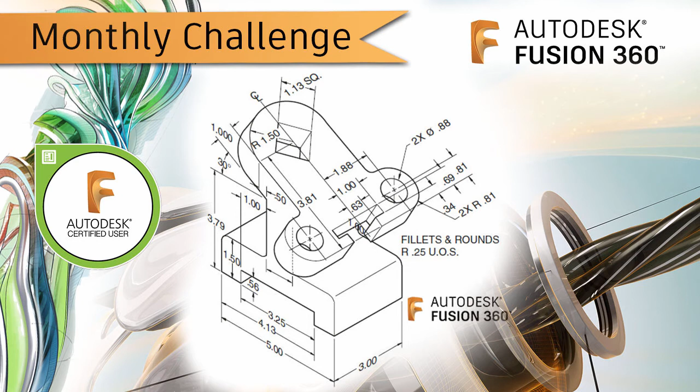For this video, we will be creating the challenge for April. Let's get started. Our challenge is in units of inches, so we're going to change active units, unit type to be inch, and hit OK. If this is your first time, under Preferences, make sure Preview sketch is turned on. Hitting OK, let's start with the rectangular base.

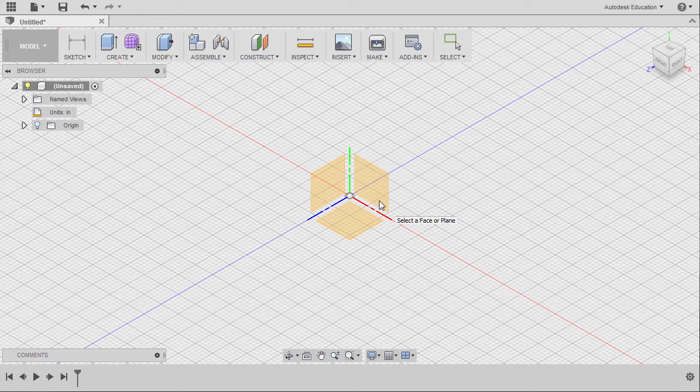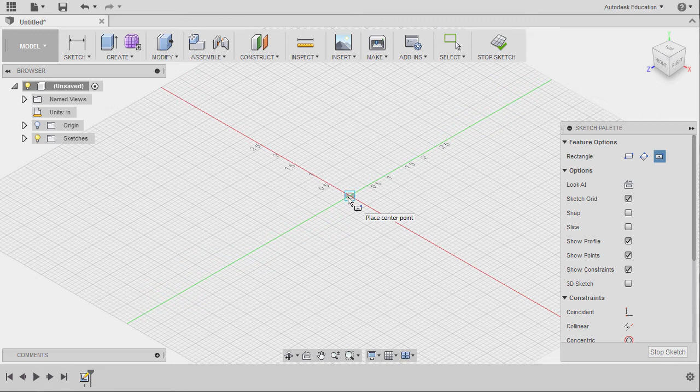I'm going to hit R to grab our rectangle. We are prompted to select a plane or face, selecting our XZ plane, left click. Under feature options, I'm going to change my rectangle to center rectangle, and go to home view for an isometric view. Our first point at the origin. For the length, I'm going to key in 5, hitting tab, and keying in 3 for the width, hitting enter.

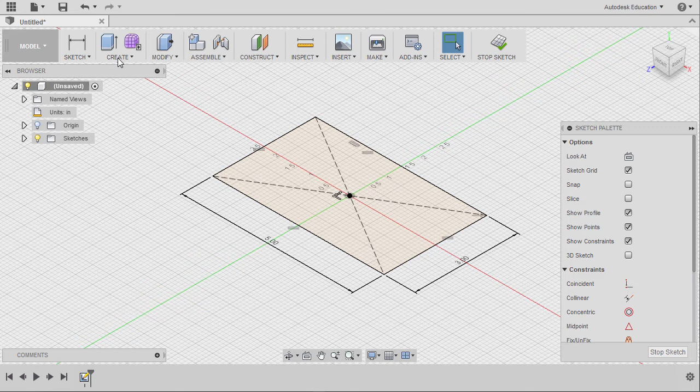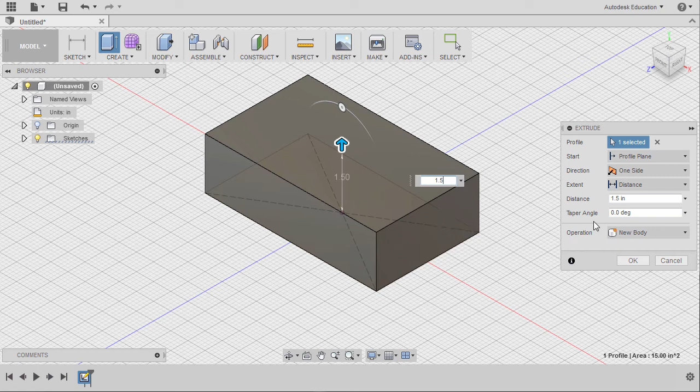Let's extrude this sketch profile now. I can hit stop sketch and grab extrude, or immediately hit E for extrude. Prompted to select a profile, selecting our rectangular profile, dragging this arrow up, the height to be 1.5. Operation new body, and hitting OK.

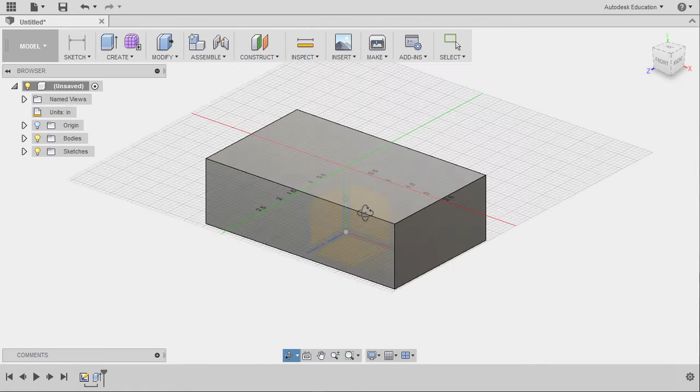Next, let's create the rectangular cut here at the bottom. I'm going to hit R to enter rectangle sketch mode. I wanted to select the plane, but it's inside, so to select this one, I can hold my left mouse button, hovering over the target selection, and a drop down will appear. Our intent is to select XY, selecting XY.

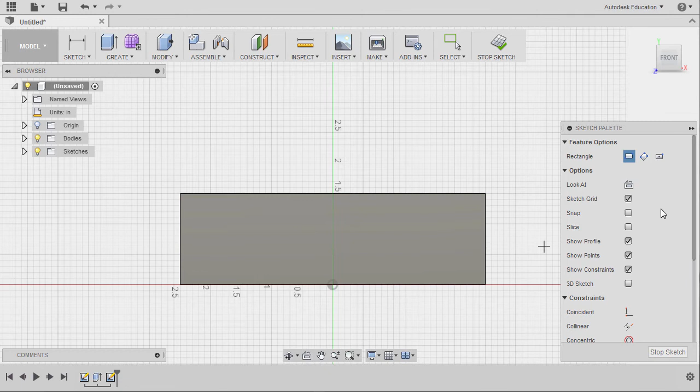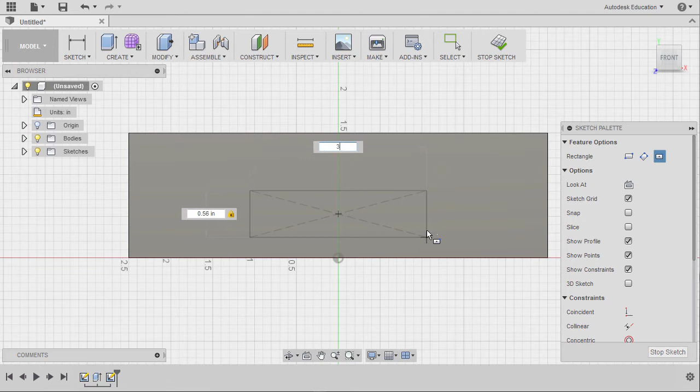Going to grab our center rectangle once more. Hover over our origin, moving up, left click. The value for this one, highlighted in blue, is 0.56. Hitting tab and keying in 3.25, hitting enter. Now we are currently sketching at the middle.

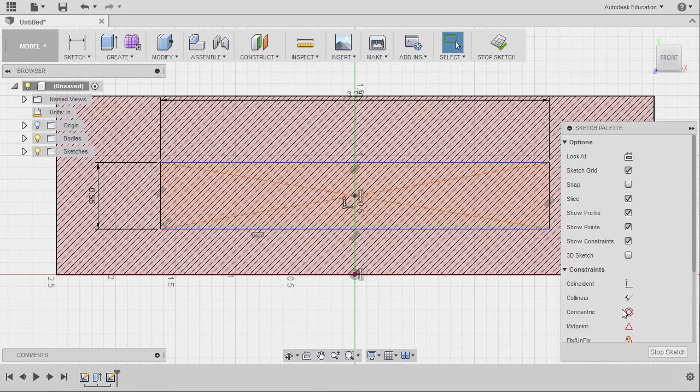In addition, we can also select slice. Going back to front view or look at, I'd like to align our center point for this rectangle and our origin vertically. Selecting horizontal vertical, selecting this point and this point, selecting this line and our origin. So once more, selecting coincident, this line and this origin.

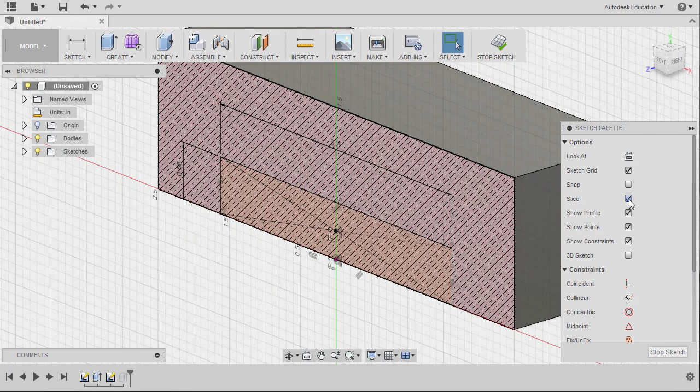Our profile sketch is now fully constrained. Hitting E for extrude, and for the profile, selecting this rectangle. But first, I'm going to hit cancel and uncheck slice. Hitting E once more, holding my left mouse button and selecting profile. The direction to be 2 sides. In addition, I want the sides under extent to be To Object.

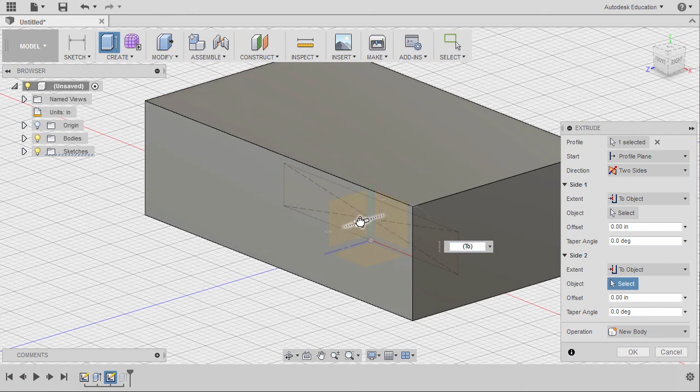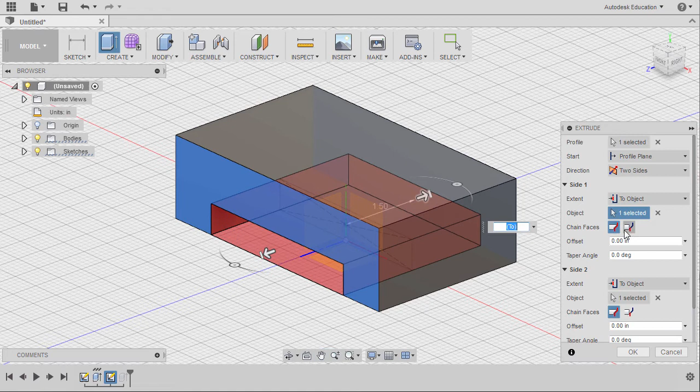Same with side 2 to object. Selecting this arrow and this face. Activating side 1, selecting this arrow and this face. Now the advantage of this approach is that whenever our width increases, our cut extrusion will also follow. So take note of my settings, and finally hitting OK. I'm going to turn off the visibility of our sketch too.

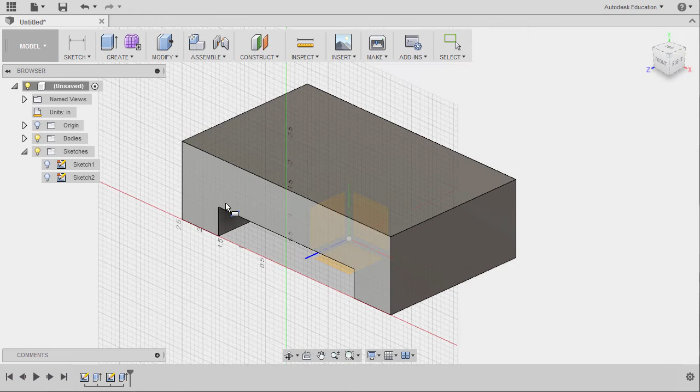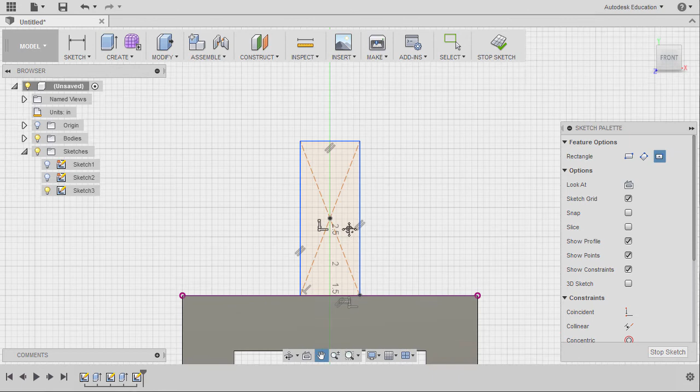Next, hitting R once more to grab our rectangle. For the plane, I'd like to select our middle plane for this instance, which is our XY plane. Hovering over here, holding my left mouse button and selecting XY. Changing my rectangle to a center rectangle type. Hovering over our origin, moving up, left click here, and left click at this intersection. Hitting D for dimension.

Based on our drawing, we have a dimension from here up to here, which is 1, hitting enter. Notice that my previous command was a dimension. If that is the case, we can always hold our right mouse button and slide up to repeat. So selecting this top horizontal line and our bottom edge, left click here to drop our dimension. The height for this one, or dimension, is

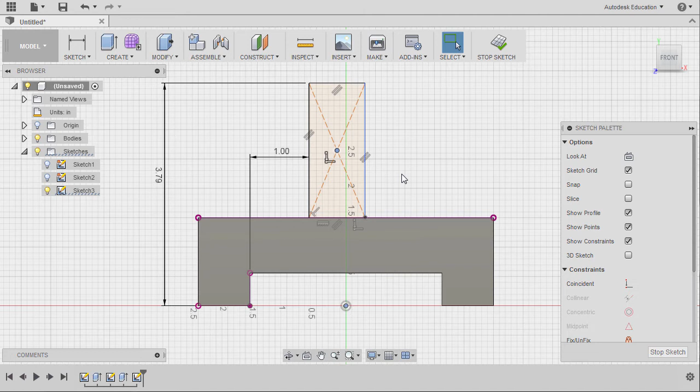3.79, hitting enter. Next, I'd like to align this point and our origin vertically, selecting this point, holding control. I am in the dimension, hitting escape, and reselecting our point once more and our origin, holding control. Right click and selecting horizontal vertical. It turned into black, meaning it's fully constrained.

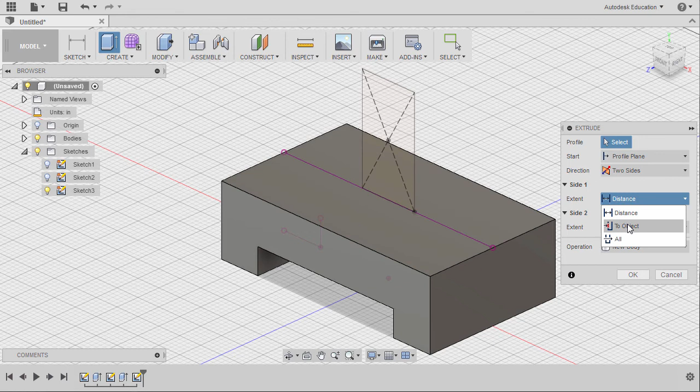Hitting E for extrude. Direction to be 2 sides as well. So repeating our previous procedure, which has the option of To Object. Same here, To Object for side 2. The profile is this rectangular profile. So once more, activating side 1 object. Left click this arrow and this face.

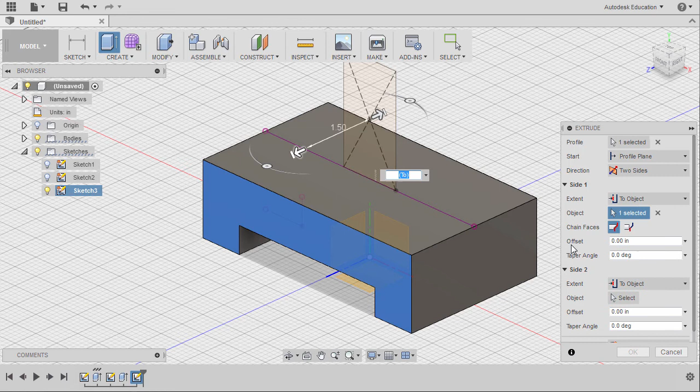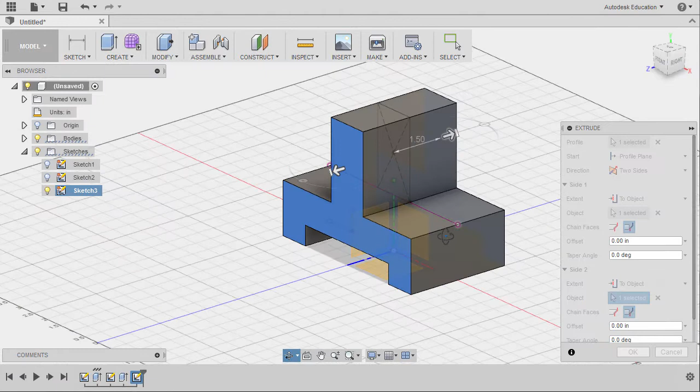Changing it to extend faces. Activating object for side 2. Selecting this arrow and this face. Changing our chain faces to extend faces. So inspecting, and finally hitting OK.

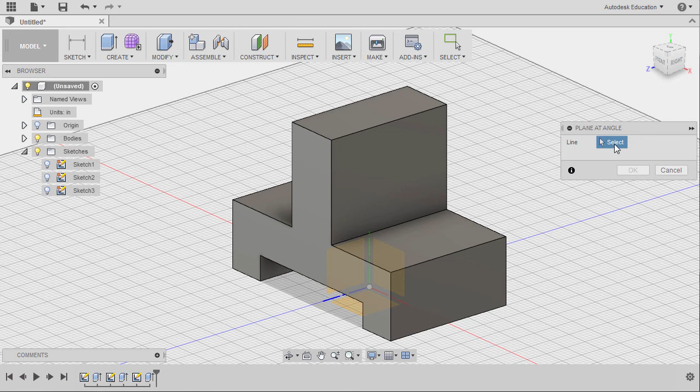In order for us to create the slanted profile, what we should do is head over to construct and select or create a plane at angle. We are prompted to select a line, selecting this edge. I'm going to go to front view and rotate our plane, keying in, just to make sure, -30, and finally hitting OK.

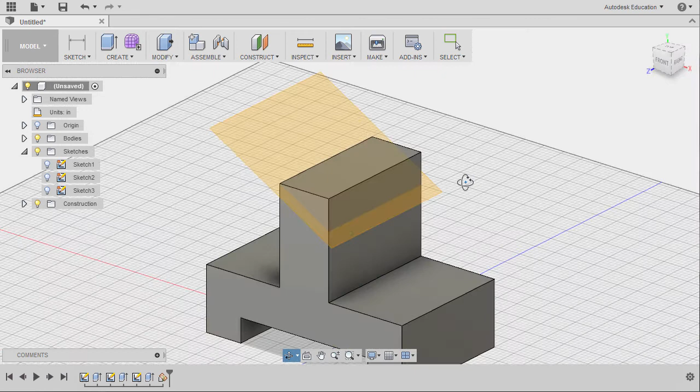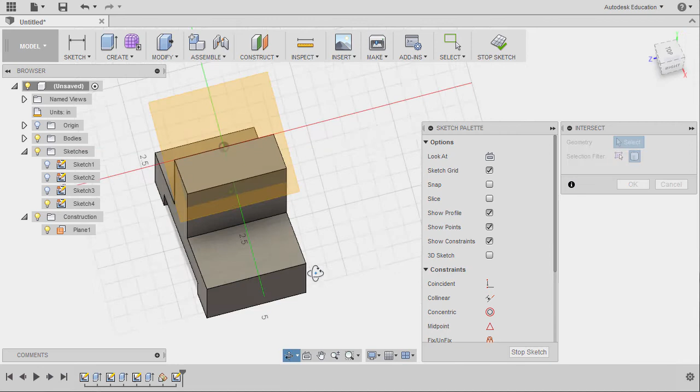Next, let's select this newly created plane. Right click and select Create Sketch. Zooming out, let's project references. I'm going to go to our construction folder and turn on plane 1. Next, heading up to Sketch, selecting Project Include. Selecting intersect, selection filter to be bodies, and selecting this body. Take note of our projection, hitting OK, going back to look at.

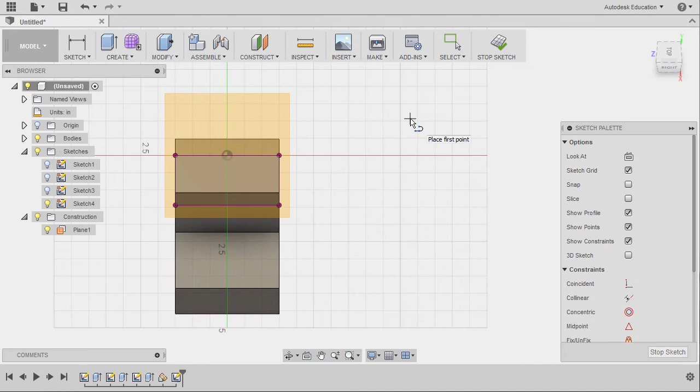Now I can create the sketch here, but for this tutorial, I'm going to demonstrate creating the sketch here and only half of our profile. So first, I'm going to hit L for line. I'm going to create a vertical line. Left click, hitting escape. Now this line will serve as our construction line. So selecting this line and hitting X.

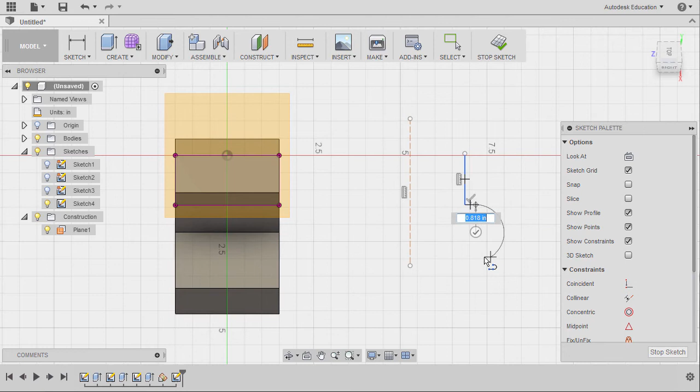Next, hitting L once more for line. Let's create a line. Left click here. Next, I'm going to hold my left mouse button to create an arc. Release. Left click here, moving up, left click, left click, left click, and go to the intersection of our construction line. Left click. Hitting escape.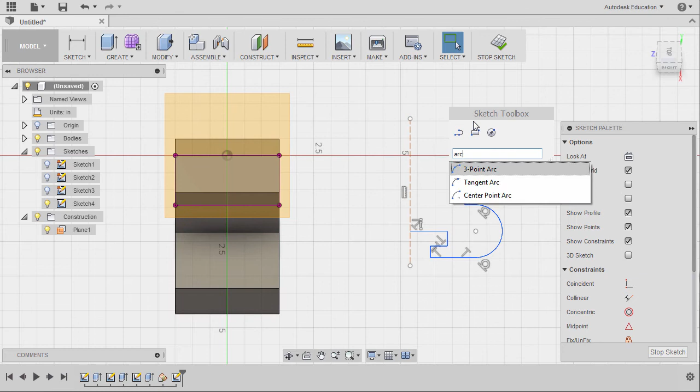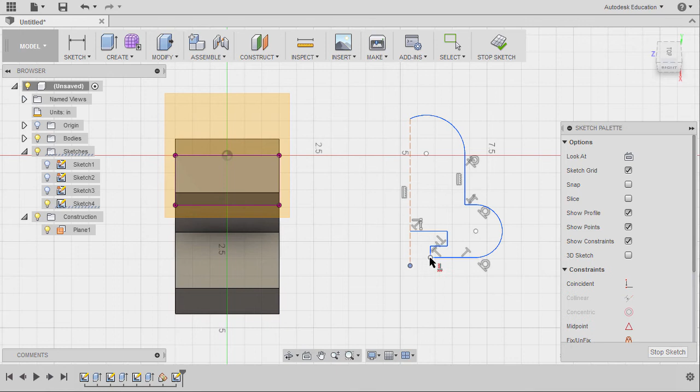Hitting S for our sketch toolbox, typing ARC, selecting 3-point arc. Left click at this endpoint and this endpoint, and left click here. Hitting escape. Let's grab our constraints. Going to horizontal, vertical. I'd like this endpoint and this point to be aligned horizontally. Zooming in. Selecting coincident. I'd like this center point and our construction line.

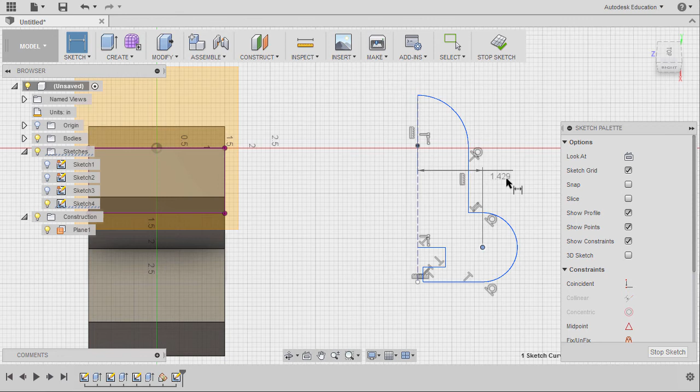Next, hitting D for dimension, selecting our vertical line and the center point. Dropping our dimension here. I'm going to key in 1.88. Hitting enter. Selecting this arc. Dropping our dimension here. Keying in 0.81. Hitting enter.

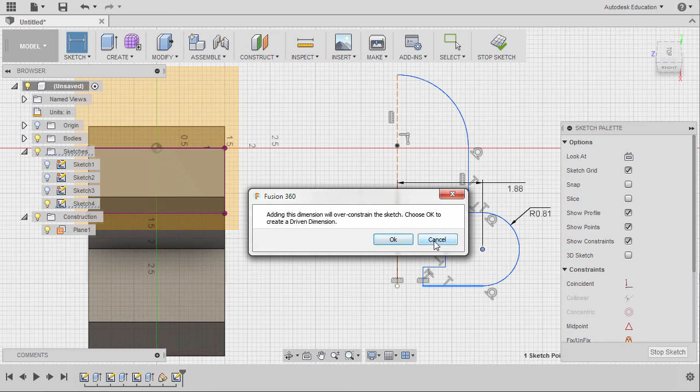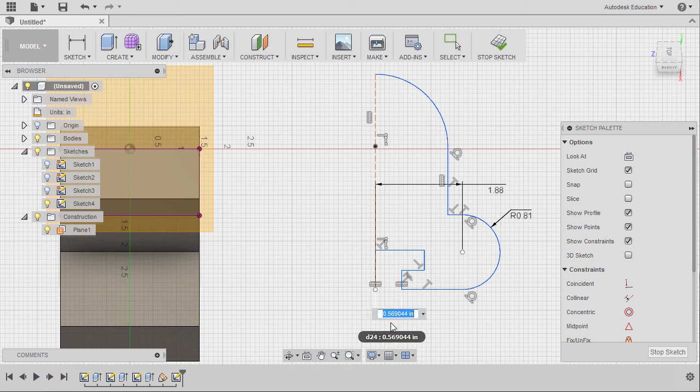Grabbing our center point and this horizontal. Dropping our dimension here. So this one is already over constrained. The reason for this one is already defined by 0.81, so no need to dimension here up to here. So next, selecting this vertical line and this vertical line. Hitting escape, double left click this one to change the value to 0.63. Hitting enter.

Same here, selecting this line and this vertical line. Left click here, keying in 1, hitting enter. Selecting this horizontal line and this horizontal line. Dropping our dimension here, keying in 0.69, hitting enter. Let's grab our dimension, selecting this arc, dropping our dimension here. The value for this one is 1.5, hitting enter.

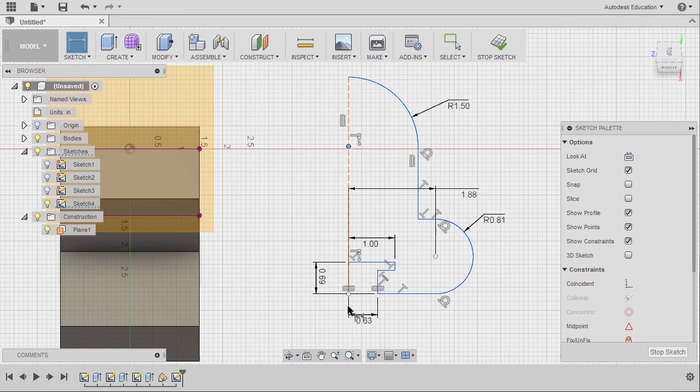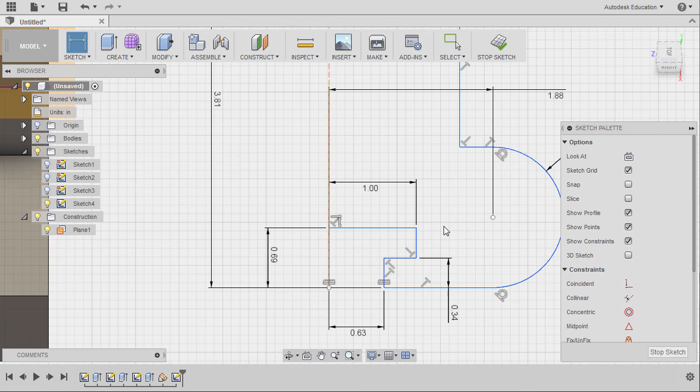Next, selecting this center point and this endpoint, dropping our dimension here, keying in 3.81, hitting enter. Next, this one moved up, so I'm going to pull this horizontal line down. And grabbing our dimensions, selecting this line, dropping our dimension here, keying in 0.34, hitting enter, zoom out.

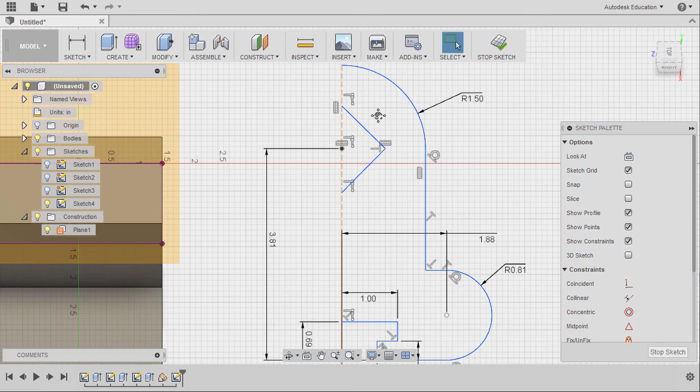Next, hitting L for line. Let's create a line from here, here, and here. Hitting escape. Grabbing constraints, horizontal, vertical, selecting this center point and this point. Hitting escape, selecting this line and this line. Right click and select perpendicular. Next, hitting D for dimension, selecting this line. Drop our dimension here, keying in 1.13, hitting enter.

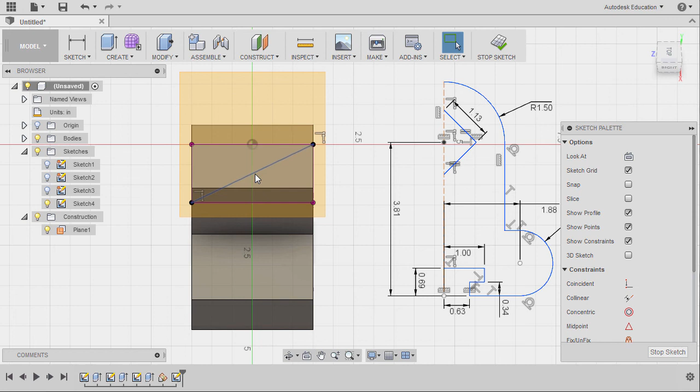Next, selecting this line and this line and this line. Right click and select equal. Let's zoom out. Next, hitting L, let's create a line from here up to here. The intent here is to locate the midpoint. So hitting S, typing PO, selecting point, dropping this at the midpoint of this line, left click, hitting escape, selecting this line, hitting X, making this as a construction line.

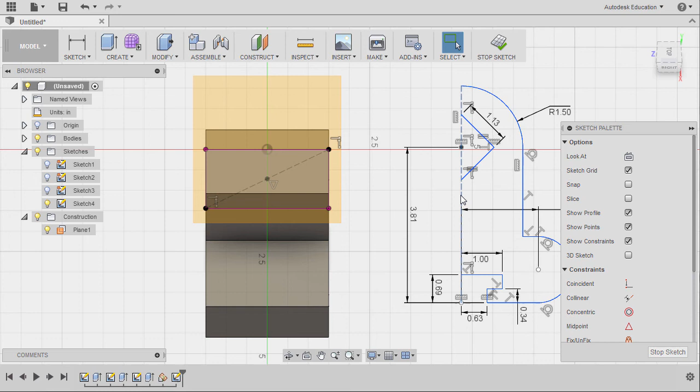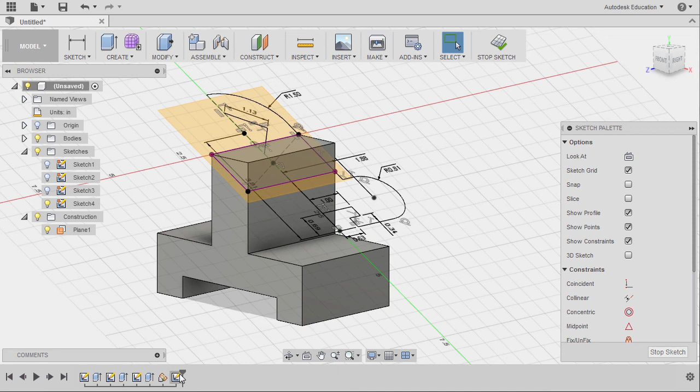Next, let's grab our vertical line and this point, right click and select midpoint. So this one turned into black, meaning it's fully constrained. And at this moment, this is the perfect situation to introduce our marker, in which we can go back in time and edit a specific feature. So I'm going to hit stop sketch and move our marker here in between plane 1 and sketch. So release. Also, I can select these buttons to move this step by step.

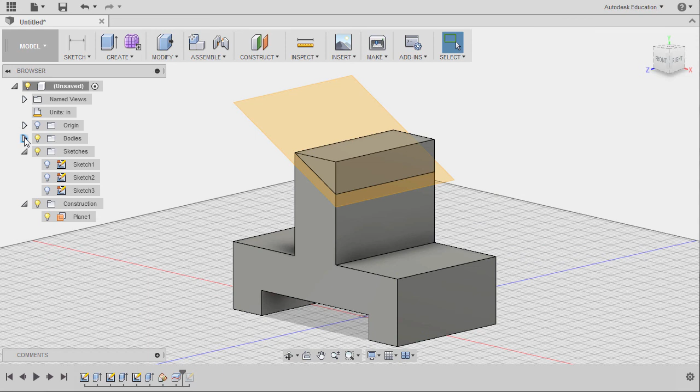So in this moment and instance, I'm going to hit S and type SPL, selecting split body. The body to split is this one. Splitting tool is this plane. Hitting OK. I'm going to expand our bodies, selecting this body. Right click and select remove. And finally, we can pull our marker at the end or select this next step.

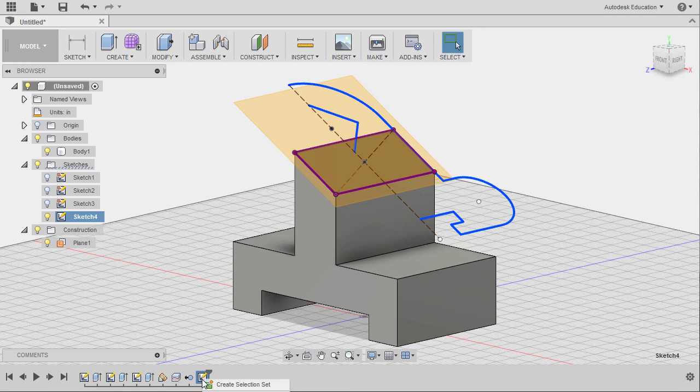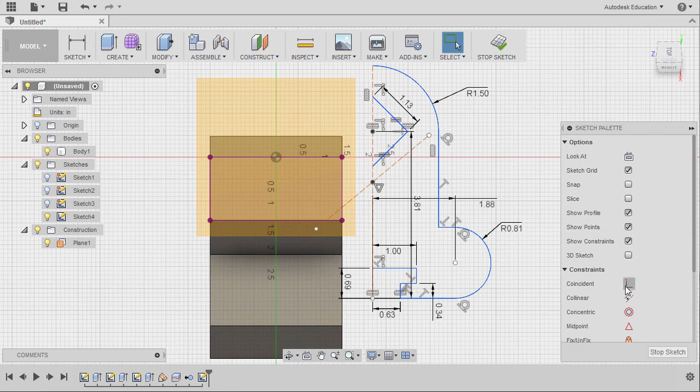Next, going back to our sketch and selecting edit sketch, zooming in. Now notice our sketch entities are now in the color of blue, meaning unconstrained. Moving this one here. Reselecting our coincident constraint, selecting this point and this point, this point and this point. So now they are fully constrained.

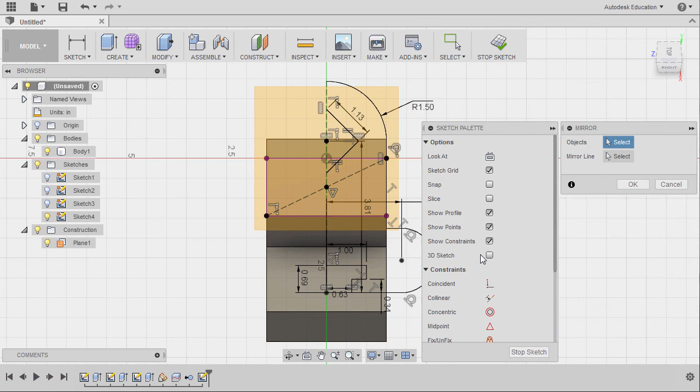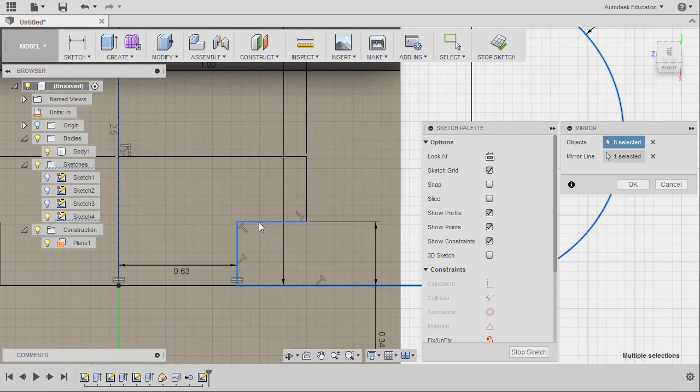Hitting escape, typing S for sketch toolbox, typing MI, selecting mirror. I'm going to activate mirror line first and select our construction line. Activating objects, selecting everything. This line, this line, this arc, this line, this line. Inspecting. So we forgot the circle. Going to hit OK, hitting C. Let's create the circle here. The diameter to be 0.88.

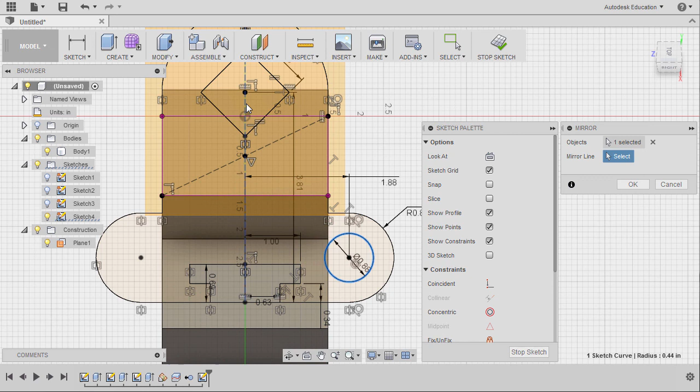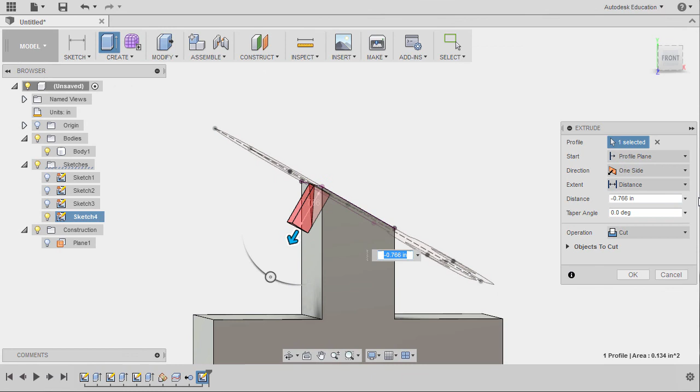Hitting S. Let's mirror again. This object, the circle, activating mirror line. Our construction line and hitting OK. Inspecting, and let's turn off the visibility of plane 1. Let's now grab our extrude tool, selecting this profile, moving this one down. Let's change the extent to object. Left click this arrow and this face. Operation cut and hitting OK.

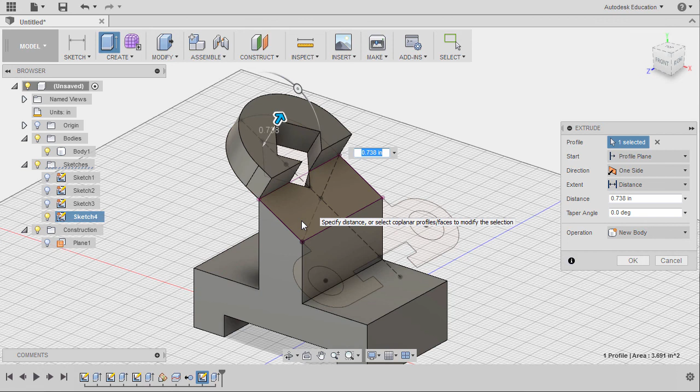Next, hitting E once more and selecting this profile. Let's move this one up. And left click here as well, adding these profiles. The height to be 1. Hitting OK. Inspecting. And turning off the visibility of sketch 4. From here, you can now add the fillets and rounds, which is 0.25. Now, UOS means unless otherwise stated.

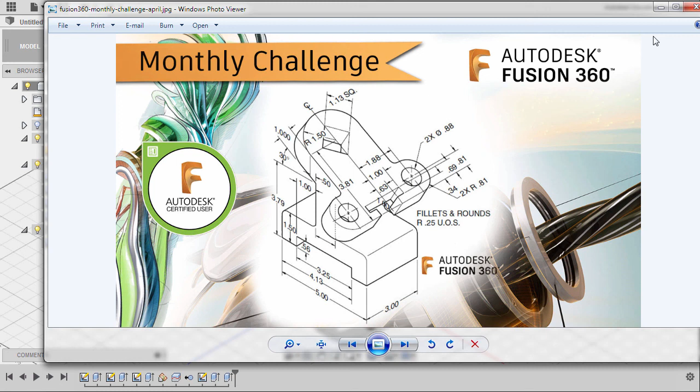So congratulations for completing our part model, and see you on the next Fusion 360 monthly challenge.